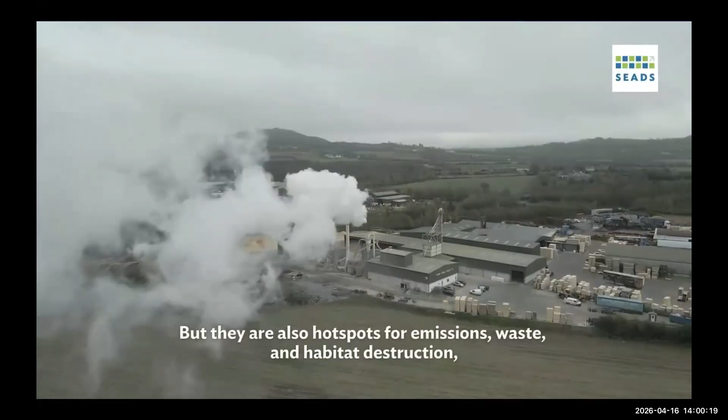Ports are the lifelines of our economies, moving 80% of global trade. But they are also hotspots for emissions, waste, and habitat destruction, while facing climate risks and other threats. The challenge is urgent, but it's also an opportunity to transform ports into hubs of innovation, efficiency, and resilience. Today, we're joined by experts who will inspire us with practical strategies and success stories on shaping green and resilient ports that cut emissions, improve air quality, and drive sustainable, future-ready growth across Southeast Asia.

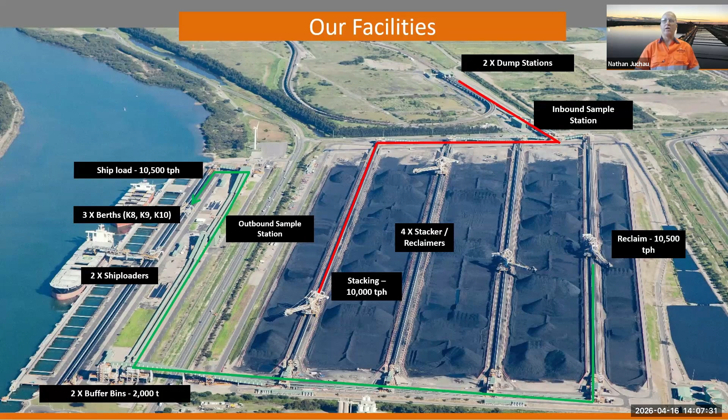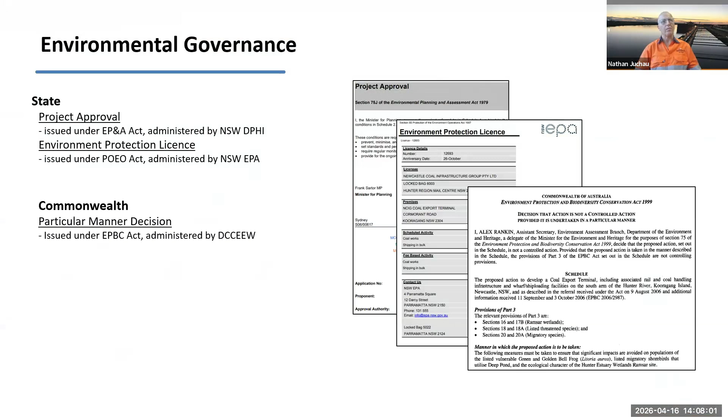When we look at what that means, we operate under a strict legislation and environmental approvals framework, and like I said, it governs what we do and our obligations. Our primary instruments are at state and Commonwealth level, you can see those instruments on the screen, and the regulators that enforce those are also a key stakeholder group which we need to service and satisfy through what we do.

How we do that on site, the usual way is we have management plans. They document the way we manage activities and the controls that are in place, translating a complex set of statutory requirements, legislation, approval documents and the like into language and systems that our people can understand, so we can deliver on those obligations.

That governance really gives us a clear direction on the key risks and controls we need to put in place to mitigate risks. The primary risks are no different for us than a lot of sites, dominated by air quality, water management and noise, which are more likely to impact a wider community or stakeholder area. But more niche things like our spontaneous combustion controls, resources management, and controls in the ecological space also need clear definition and delivery on site.

What's true here is true anywhere else. The increasing frequency of extreme weather events is also making it increasingly important that we get these things right.

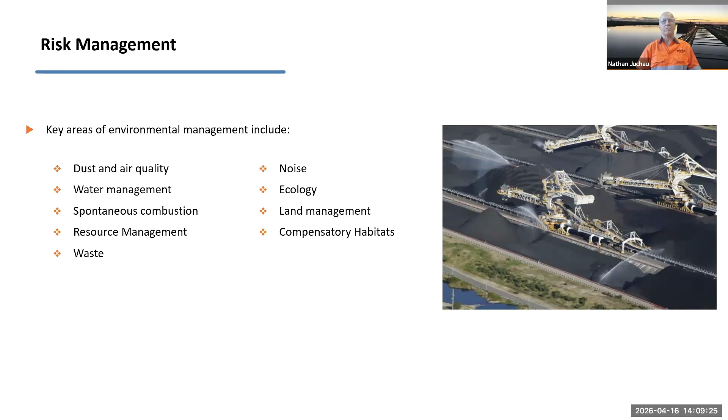I'll probably start with and provide most detail around our dust management system, being one of our key environmental risks, and you might hear a bit more about dust as we move through the presentations. We really act on an integrated system with a number of different aspects needed to account for that dynamic nature of the risk.

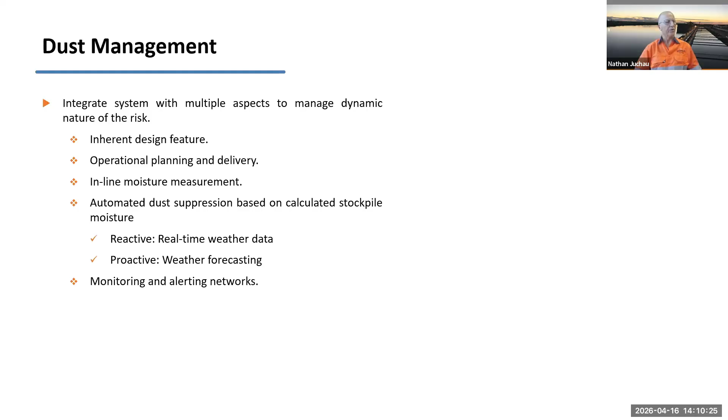Weather events, changing product types, these sort of things all need to be handled by this integrated system. It's really founded on plant design, inherent design features, infrastructure arrangement, and primary controls. Operations obviously play a huge part - the handling of the product, how we account for conditions and placement locations. Inline moisture monitoring gives us that baseline of what we need to work off, and gives us the start of our risk profiling for different product types.

But the real noticeable part of this is that automated dust suppression system. It works on weather data - a very data-driven system, using both real-time weather and forecast weather systems, and it's very reactionary. As conditions change, the controls change as well, from a greater application of water or even slowing things down, changing the way those controls are applied. The weather forecasting gives us a chance to get in front of weather systems which may cause an issue.

Things like pre-wetting stockpiles, or as you see in the photo, manual veneering. Monitoring and alerting networks are a compliance requirement, but also give us a heads up when things aren't going well. We've got operational-type monitoring around the site and compliance monitoring within the community, which allows us to adjust controls and make adjustments to operations on the run, meaning we stay within the bounds that are set for us.

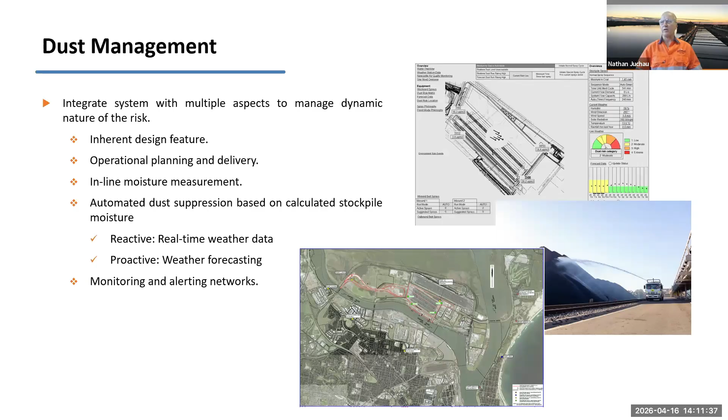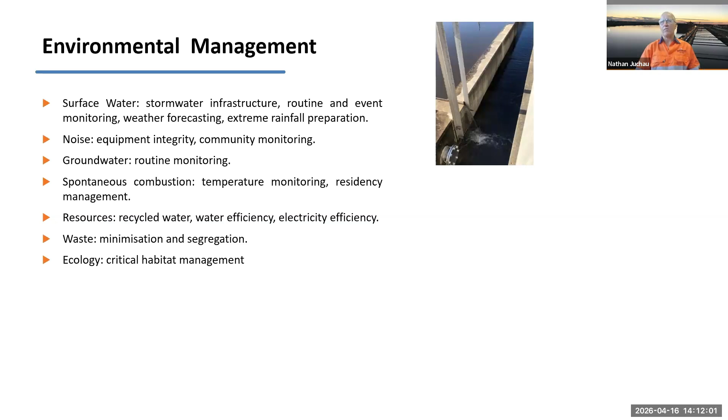There's a range of other risks I outlined previously, and there's a network of controls amongst all of those - I won't go into a lot of detail. A lot of things are routine here, but when I look at stormwater infrastructure as a way of managing surface water risk, it's important you get that right and are mindful of your conditions and those changing conditions when it comes to extreme rainfall and the like. Noise is a lot about monitoring, but also about constantly keeping on top of your equipment integrity or condition, which becomes a very difficult problem if it gets away from you.

Resources management - a recent addition for us is the introduction of a recycled water stream. We're really conscious in Australia of drought conditions, and as those conditions start to apply restrictions to the community, it's important that as a business we don't heighten that. So we're at the point now where greater than 90% of our water is either recycled water or captured on site, which is a big change from years ago. That's been a big change in the water security space, but also the social equity space.

Waste mitigation, segregation, also critical habitat management. As I said, we're close to critical wetlands, and NCIG manages, partially as an obligation, compensatory habitat, but also the habitat for two endangered species - an amphibian and a bird species - is managed actively by NCIG. So that's kind of it when we look at risks around the environmental space.

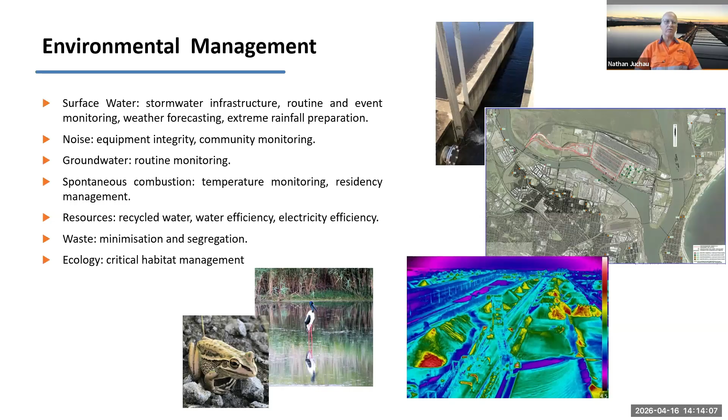It's also important that we manage and provide guidance to stakeholders on their expectations, but also let them understand what NCIG finds important and what's important to us. How they understand that is primarily through our sustainability strategy. You can see from our strategy there, it started out with our customers' requirements and staying attentive and flexible to that. Also a strong governance and compliance basis, where a lot of this information and controls I've just talked about fits in, but the above-compliance side of things is kind of what's captured here.

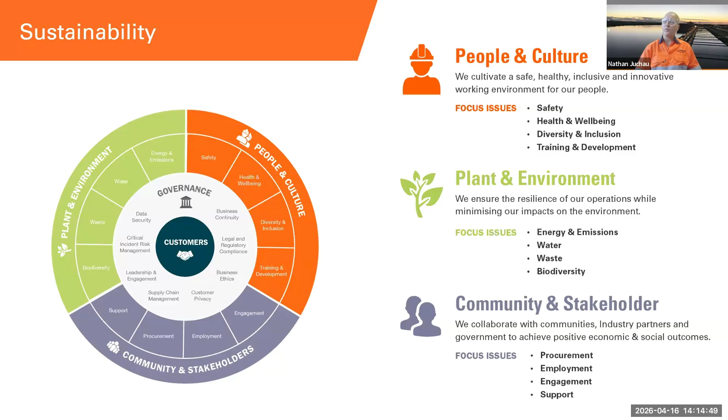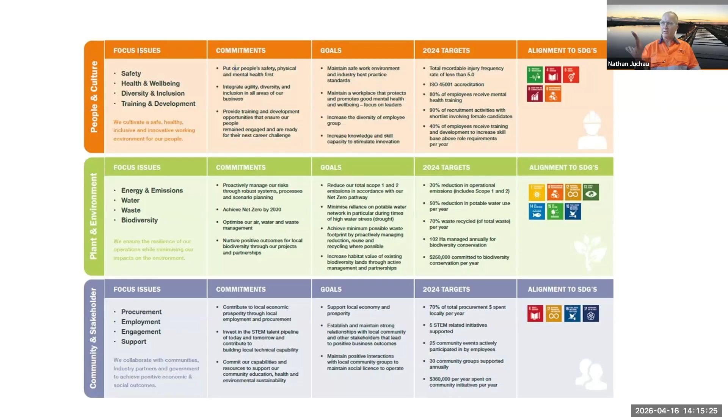You can see the area we're talking about now is the plant and environment space. We make sure we're very clear on what that means, so our people can understand, but also our stakeholders can understand. So clearly articulating those goals and particularly targets, so that we hold ourselves to account and can also be challenged on whether that's comparable with expectations, community standards, and social standards. This is something we've seen a large uptick in appreciation for from our stakeholders and understanding of what NCIG is all about. You can see some of those things translate from what I was talking about before.

And we really demonstrate that commitment through our transparency. It's great if you're doing good work - it's even better if you do good work and people know about it. So again, getting out there those stated commitments, what that means, the level you want to achieve, and then demonstrating your performance and being very transparent around that.

So that looks like for us: a website, management approach documents which lay out obligations and commitments, policy suites, performance reporting - being very transparent around that - sustainability and compliance reporting, which are different and have a different tone, but certainly making those available. And then the background data, which helps people see those trends and be really transparent around performance that might be good or below par, and demonstrating that you own that and are prepared to continue working toward what you set out to achieve.

So, Jackie, thank you. That's all I had for today. Happy to hand it over.

Nathan, that was fantastic, and thank you so much. I think it's a really fantastic demonstration of how things are done well, and I've certainly had the benefit of visiting your facility, and I can verify that it certainly is done well. Really appreciate that presentation. We'd love to invite you back for Q&A at the end of the session. I've certainly jotted down a few questions, and I'm sure the audience have some as well. Audience members, if you have questions for any of our panelists, please use the Q&A chat function, and we'll start to see those coming through and respond towards the end of our session. But Nathan, thank you so much.

DSH has sold over 10,000 units installed in 74 countries around the world. We work with a range of materials: aggregates, grains, fertilizers, salt, sugar, wood pellets, and we work with most of the largest corporate companies loading bulk materials in the world.

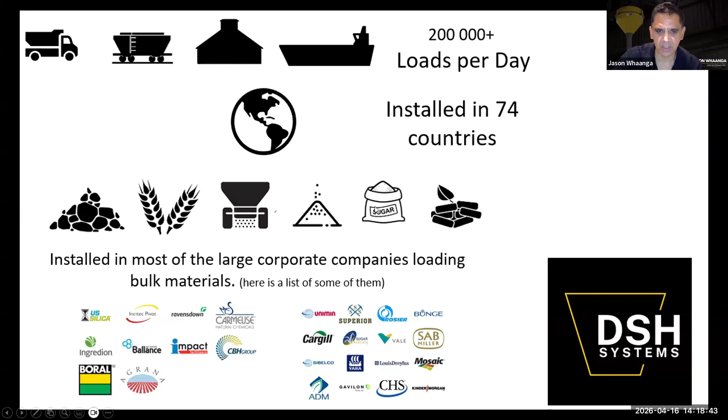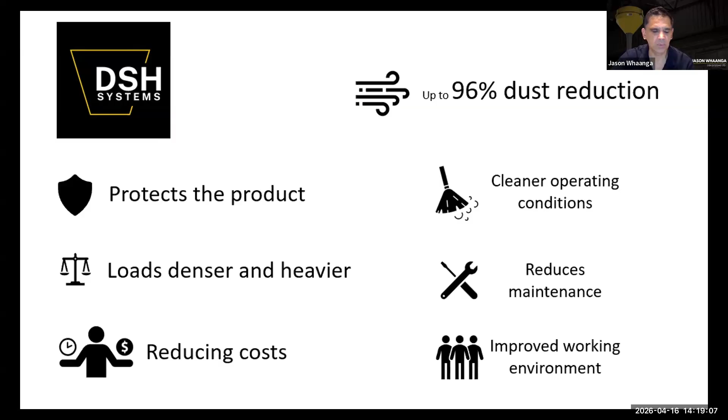When we work with products as far as we're loading, we try and reduce the dust by up to 96%. When we do that, we can protect the product, clean our operating conditions, load denser and heavier, reduce maintenance and reduce cost.

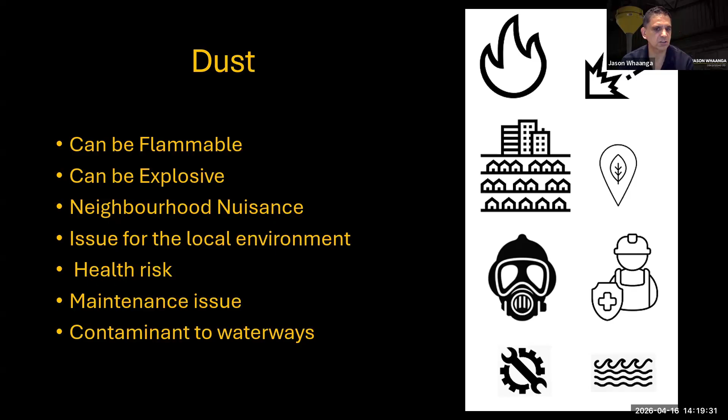And I'm here to speak about dust. As Nathan alluded to earlier, there's a number of factors with dust that are problematic. It can be flammable, explosive, a neighbourhood nuisance, issues for the local environment, health risks, maintenance issues, and it's a contaminant to waterways.

As far as explosions go, I had the pleasure of going to this site in the UK. Around about 2020, they had an explosion that blew the top off 50 silos at the site, and the cost of remediation from this risk was significant. I looked at the infrastructure they put in after the fact, and it's so big that reducing the dust before this happens definitely reduces your risk.

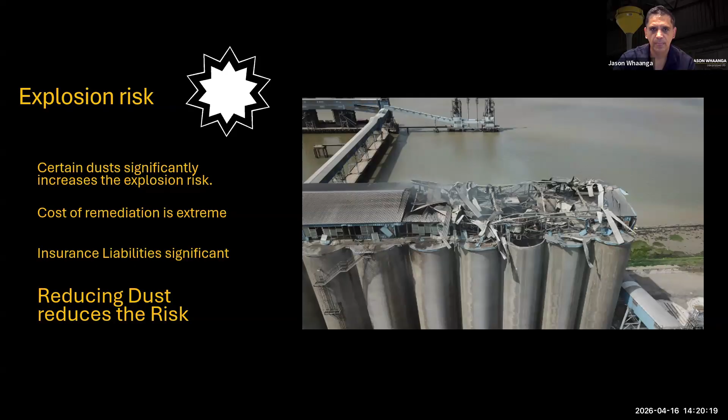This is another site. They had issues with the neighbours complaining about the dust from across the other side of the harbour. They had a standard telescopic chute loading fertiliser into the ship, and they were told to sort it out, otherwise they would close the port. The cheapest and easiest way was they communicated with us, and you can see quite a big difference from before and after.

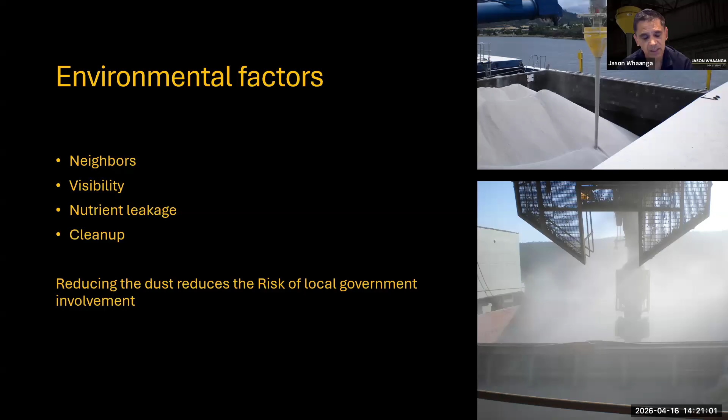Unfortunately, our system will work with most products, but unfortunately coal, Nathan, isn't one of them. And the other ones are like flours or powdery products.

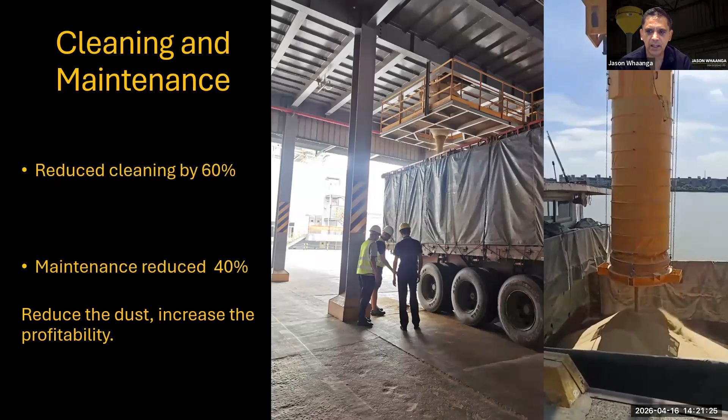So one thing is, if you reduce the dust, you reduce things like cleaning and maintenance. This is a site in China. They manufacture soybean oil, and they installed a number of systems, including our hoppers here. They reported to me that they reduced cleaning by 60% and their maintenance at the same time within these areas of the plant reduced by 40%.

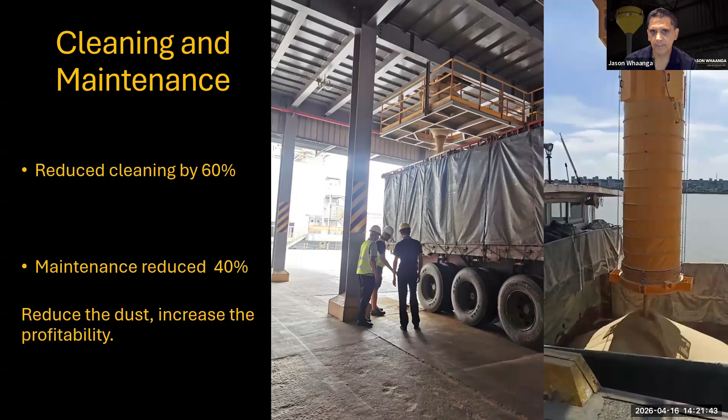So with DSH, one of the key things for us is to work through our design criteria for passive dust reduction for equipment. First of all, we've got to understand the reasons why the dust is being generated in the first place. And then we decide, can we passively manipulate it either through our hopper or through some other company's technology, and we can help our customers find that product.

And can you passively manipulate the environment? That's around something like, can we put something in the way to stop the wind coming through, close the door, those sorts of things.

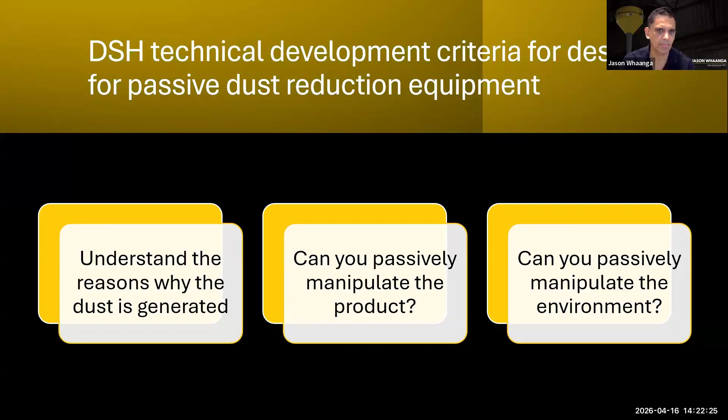From that criteria, then we use our fundamental design principles to design or sort out a product for the customers: controlling the material to control the dust, which I'll talk about shortly; keeping the dust within the product stream, which is containing it; reducing the number and size of weak transfer shapes, which I'll also talk about; and keeping your technology simple and smart, designing the solution for each application and material, not just something you get out of the box and hope it works.

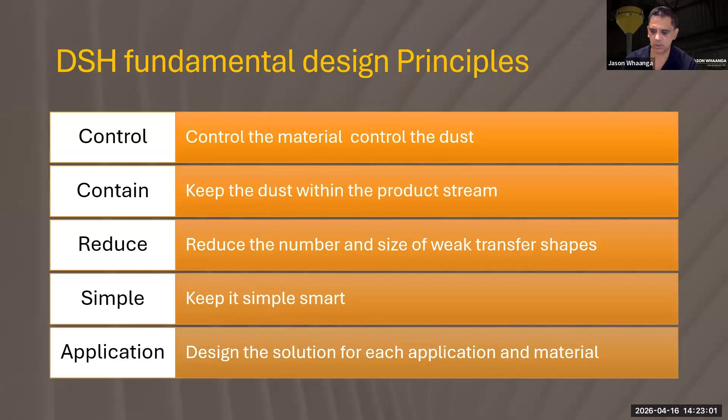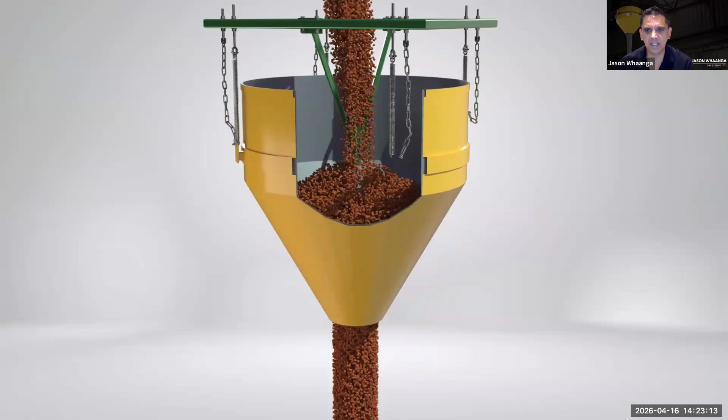So this is our hopper. DSH hoppers control the material from the entry point to where it is stationary in the pile. We backfill the hopper to take the air out of the material as it enters, and it discharges in a solid heavy column. That solid heavy column keeps the dust inside, and as it enters the pile below, it fills the pile up from within, keeping the dust contained.

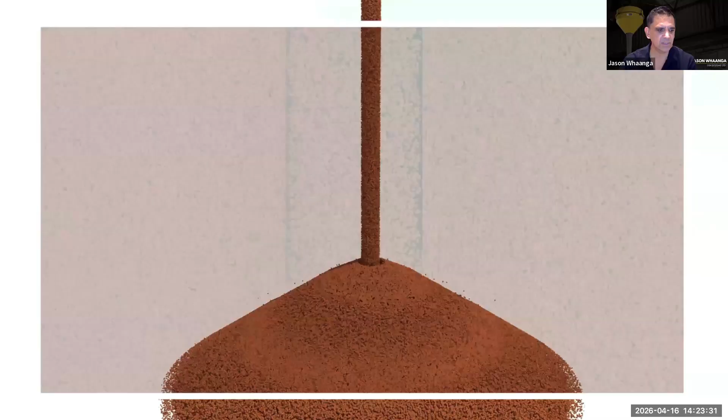The shape of material is the key thing. With our hopper, we create a circular round stream, a column of material that falls through the air up to 30 meters, and it drives into the pile below.

Now, shapes of material have a big impact on how you can control the dust. If it's a weak shape, like the half moon you see coming off a conveyor, it will aerate very quickly. An aerated product will fall through the air down into the pile below, and it'll slide across the surface or ricochet, creating dust.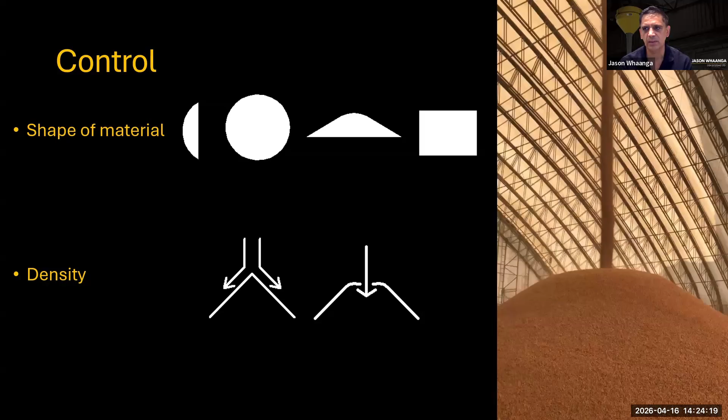This is wood pellets loading at 600 tons per hour, falling 30 meters. So in some applications with some products, you can get very good results by controlling the product through technologies like ours or other technologies.

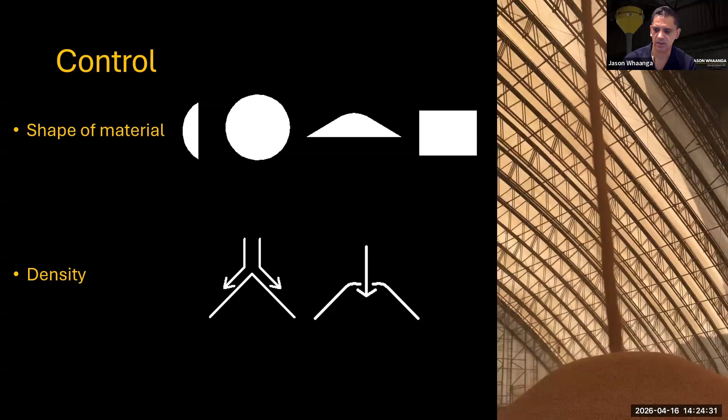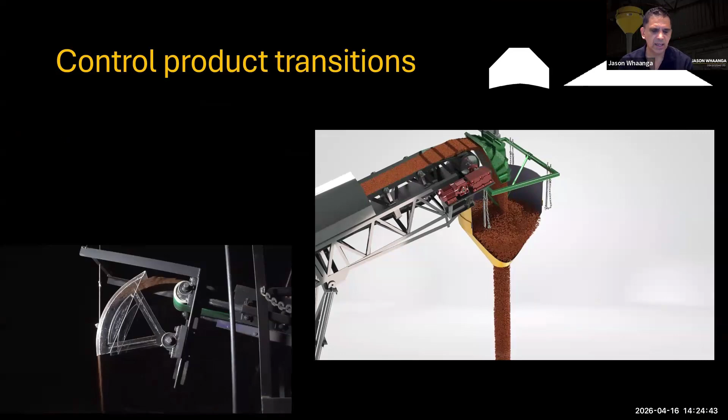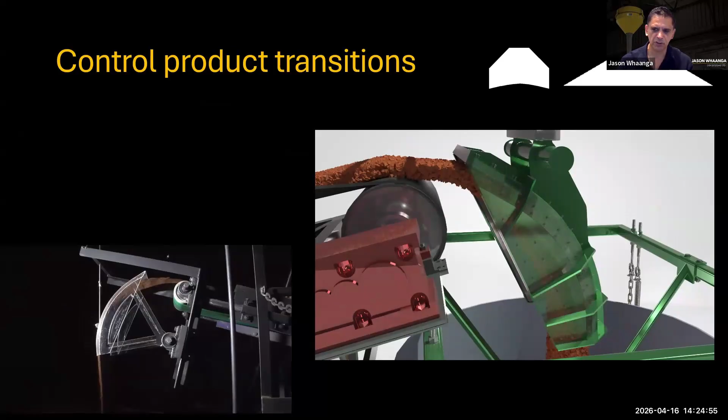Other technologies include these product transitions, like in the video here. This is a compressing deflector, and we control the direction, speed and shape that the material flows from the discharge of the conveyor, so that we compress it to keep it in a good strong shape, reducing the time that it aerates. That way we control it to a point where we can take it into our hopper, or it can go to another conveyor, or other applications.

When we come to design solutions, our key criteria is understanding what we're loading - what's the material, whether it's an aggregate, wheat, or bran - and how you're loading it. We look at technologies, whether ours or someone else's, that can stop the dust, and we may integrate a number of technologies together, or talk to our clients about ways they can do it.

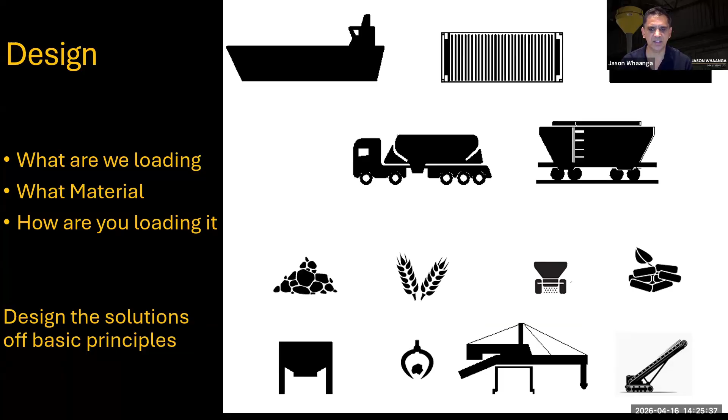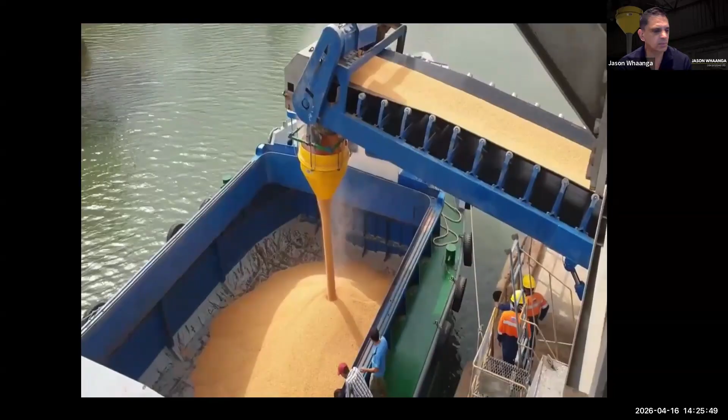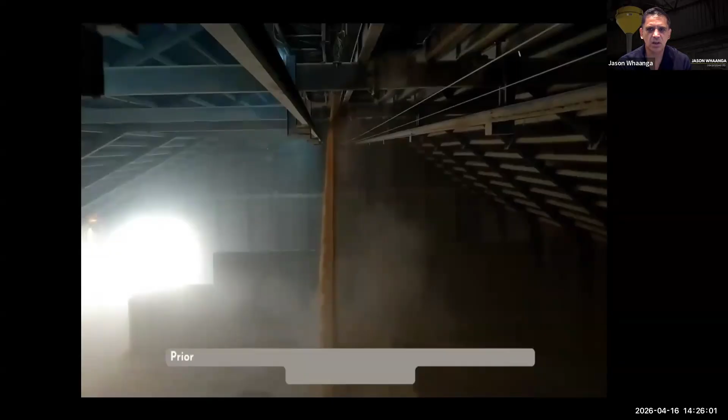This is a port loading site in Vietnam. We engaged with them in 2019, and we load things from ship loaders to truck loaders to warehouses. We had to deal with lots of different things like wind, applications like this bulk store, and even the ship unloaders. What we found is we had to design every solution to fit that particular application.

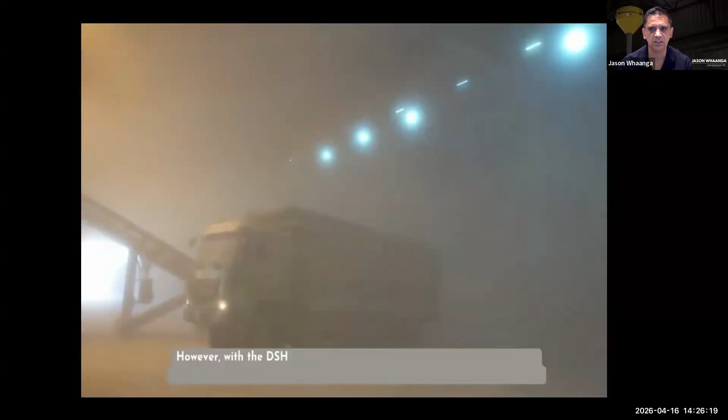You can see here, prior to us installing this hopper, it was extremely dusty. This is post the installation, and in the next shot you can see a significant difference. We went through and changed most of them. The customer was very satisfied, and I think we've got almost 20 units at this site.

This is our latest solution - a grain terminal in Quebec. We were asked to provide a solution for them. It was a very tricky solution because they needed a unit that could be tilted. The unit must not overfill, otherwise you've got weight issues of material going up the chute. We also had to design an overflow and quite a number of different factors.

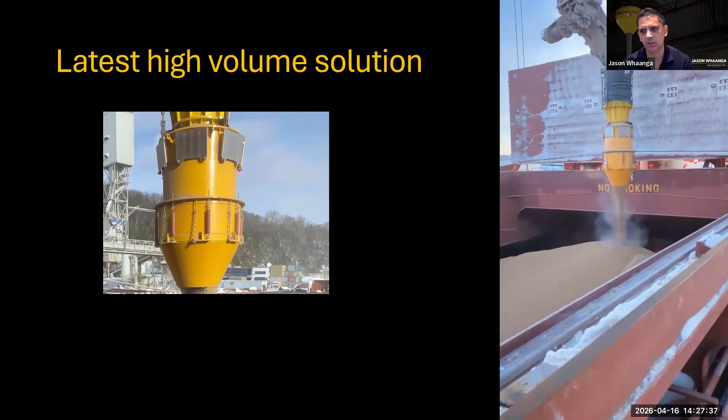So we came up with this unit here, and you'll see in a second that one of the issues we had to contend with is there was a batch weigher, and you can see the flow changes for a second and then it starts back up again. So we had to take those pulses into account - when you design something for a site, you've got to work around those things.

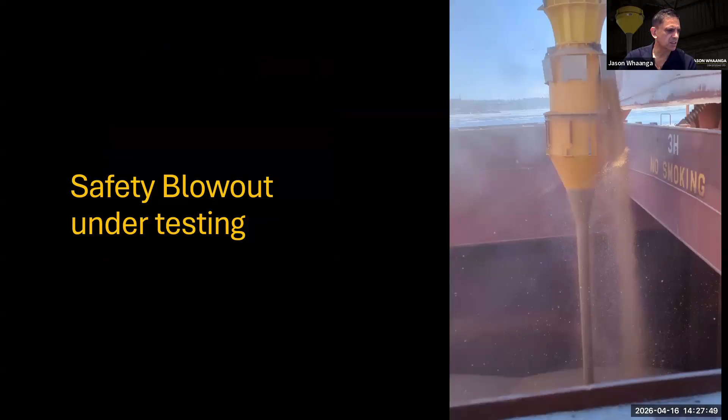Here's the safety blowout under test.

We also develop things like trimmers. This is a project we're doing for an Australian port, and we're also doing one for a USA port that's quite different. This is a hopper at the top of the chute that I showed you in China, and we can develop things for cranes and stackers and a variety of materials. The good thing about this is it reduces the wind and requirements for filtration.

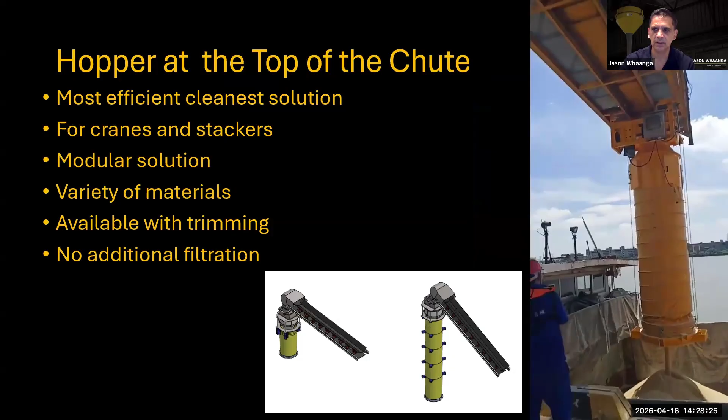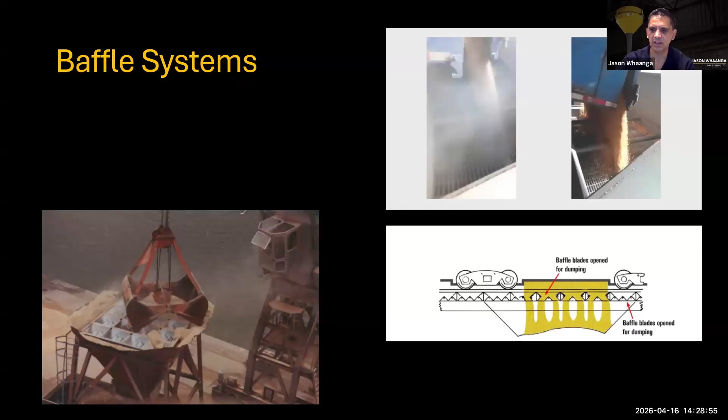As well as that, we have partnerships with companies around the world, like these baffle systems - this is an Australian baffle making system. How baffle systems work is they stop the air from displacing from around the area, so that when you dump a pile of product there, instead of the air rushing away carrying all the dust, it traps that air underneath the baffles, and the product flows through with significant dust reduction.

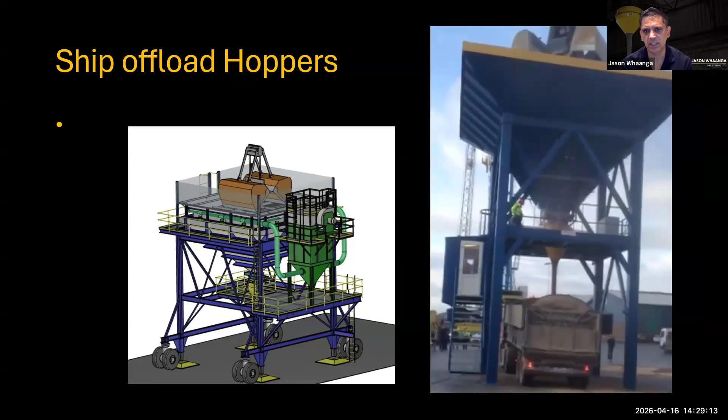This is another technology that we work with - our hopper underneath an unloading silo. So when you integrate a baffle system and our hopper, you get significant dust reduction.

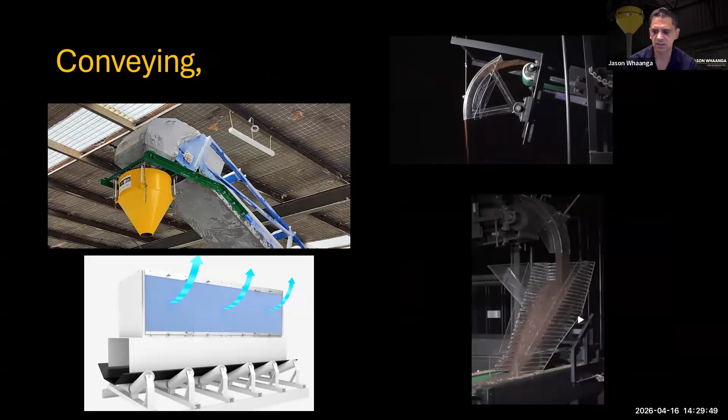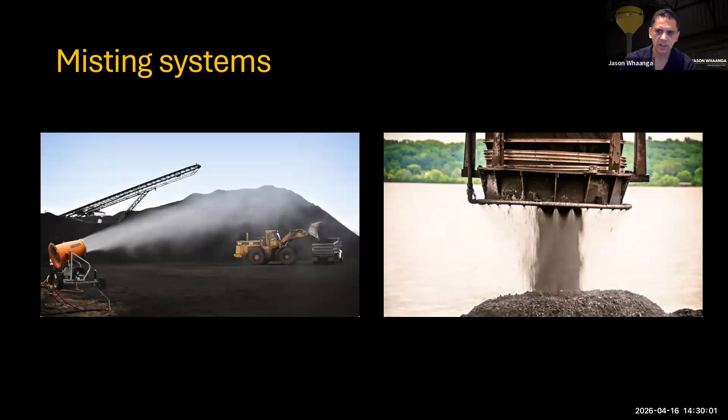With conveying, we have a number of technologies where we can shape the material to stop the dust, so instead of it being in an uncontrolled fashion, it's under control. Where you can, we help put you on to things like passive dust filtration, where you're changing the shape and there may be some dust there. We've also designed a new head box for chutes to integrate a few of these technologies, as well as our blowouts. And of course, you saw the misting systems and Nathan's chute systems before - we've actually integrated one with our hopper as well for an extremely dusty product, where they didn't want the overflow.

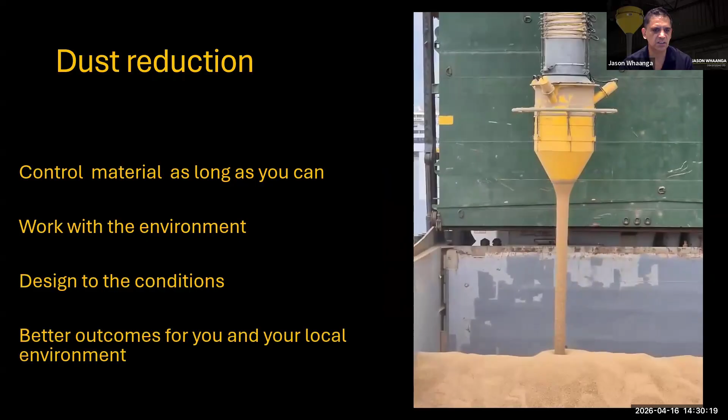So in conclusion, if you want to control the dust, control the material for as long as you can. Work with the environment that you're in - don't try and fight it. Design to the conditions, and you get better outcomes for you and your local environment if you work to those kinds of standards. Thank you.

Thank you, Jason, so much. That was a fantastic presentation, and it was really great to get some insights into the different solutions that are out there that can be applied to existing infrastructure, but also new infrastructure that can be put in place to manage some of these dust issues. I think really learning and understanding about the shapes and thinking about the different types of materials and the environments that ports are operating in is critical to finding the right solution.

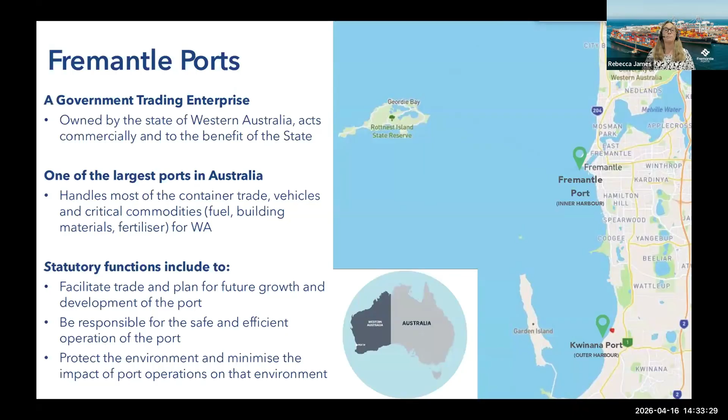As a government trading enterprise, we have statutory functions under our Western Australian Port Authorities Act: to facilitate trade and plan for future growth and development of the port, be responsible for the safe and efficient operation of the port, and have a responsibility to protect the environment and minimise the port's impact on that environment. Thank you, next slide.

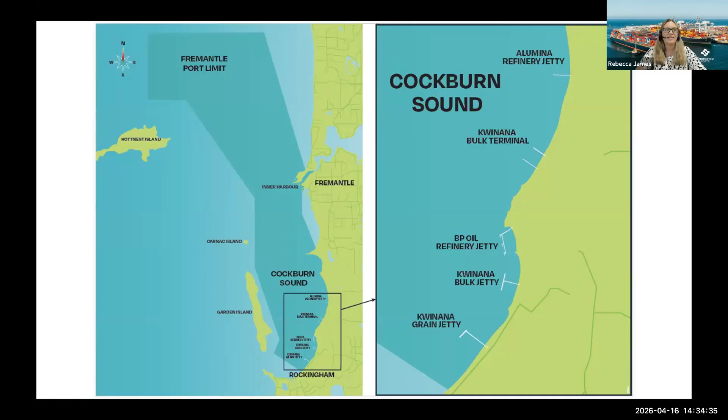Thank you, next slide. The facility I'll be talking about today is the Kwinana Bulk Jetty, where we have our Siwertell unloader. This is mainly an import facility, and we have third-party stevedores undertaking the unloading for us. There are two berths at this jetty that accommodate bulk products such as fertilisers, sulphur, ammonium nitrate, and liquid bulk commodities including petroleum, liquid fertilisers, and bitumen.

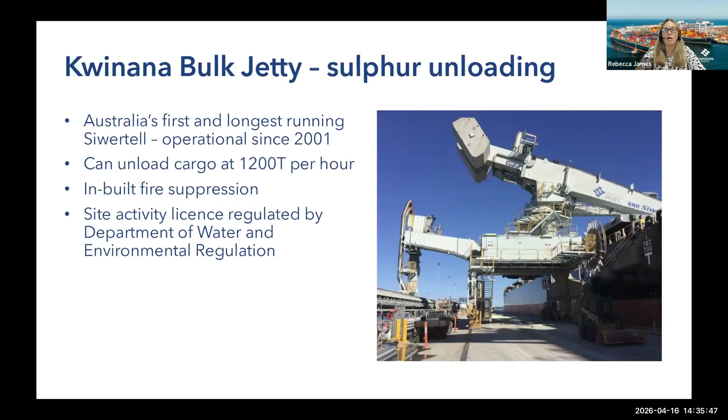Next slide, thanks. At Kwinana Bulk Jetty we've got Australia's first Siwertell put into operation, back in 2001. One of the main drivers for that was the location of Cockburn Sound in which we're operating. The Siwertell we've got can unload cargo, or sulphur, at 1,200 tonnes per hour, and it includes an inbuilt fire suppression system, which is important for sulphur. Like other bulk handling facilities in Australia, our activities on site are very heavily regulated, and we hold a licence under our State Department of Water and Environmental Regulation.

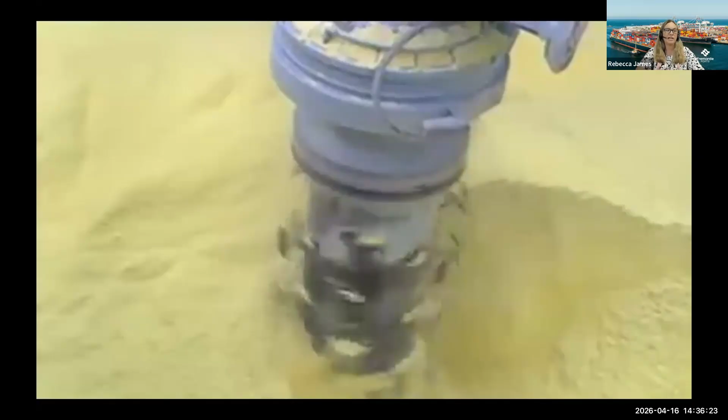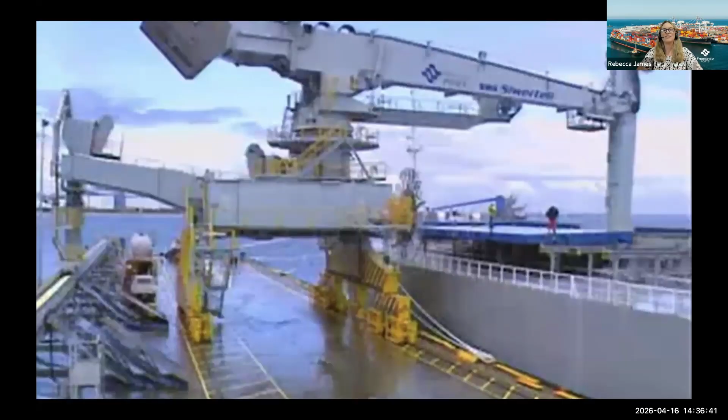This next slide shows the Siwertell inlet feeder. The sulphur is picked up from below the cargo surface by a counter-rotating head, which feeds material into the vertical screw in a continuous unloading fashion. It did look much better on video, but hopefully you can get the picture. This is the Siwertell from the outside—often you really can't tell that operations are occurring, due to the lack of dust and spillage that can often be associated with traditional grab unloaders and other methods.

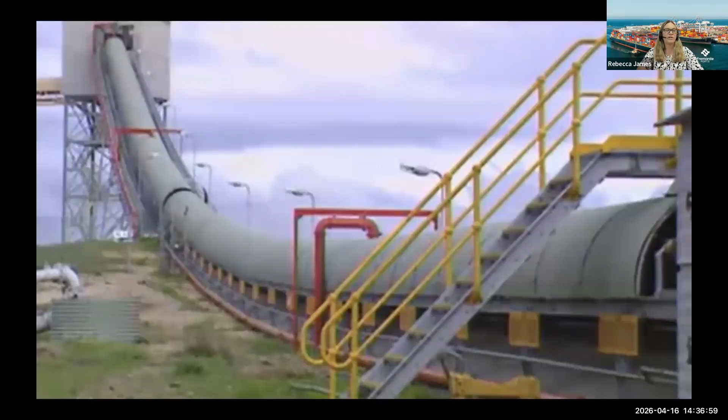Back on the other slide, the bulk material transfers from the vertical conveyors onto the horizontal conveyors, and the material drops through enclosed gantries that have their own dust filters leading onto the conveyors.

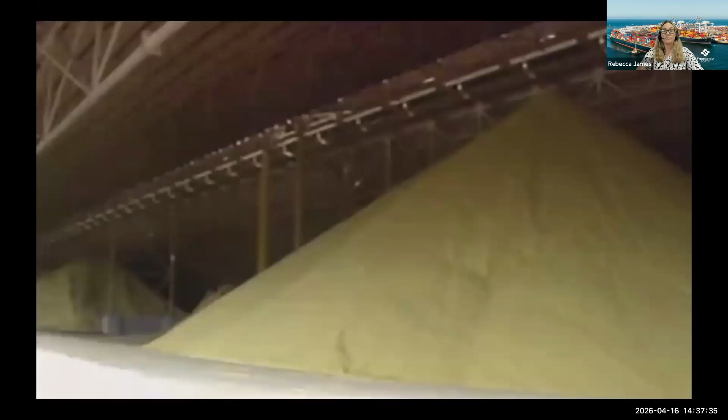The next slide shows those conveyors, where there are fully enclosed conveyors that come down from the jetty and lead into the landside shed on shore. The next photo shows the fully enclosed system created by the Siwertell and the conveyors, leading in and dropping down from the shed straight into the sulphur shed.

Some of the main environmental benefits from a system like this is that there's near zero dust emissions in the outside environment, as they're fully enclosed from the ship hold to the shore conveyors. This means dust isn't escaping into the air during unloading, and eliminates the need for water sprays, large dust suppression systems and dust monitoring networks.

There's no spillage either into the water or onto the berth. This can prevent cargo entering the harbour or contaminating the berth side, avoiding both that contamination and costly berth cleanups and loss of products.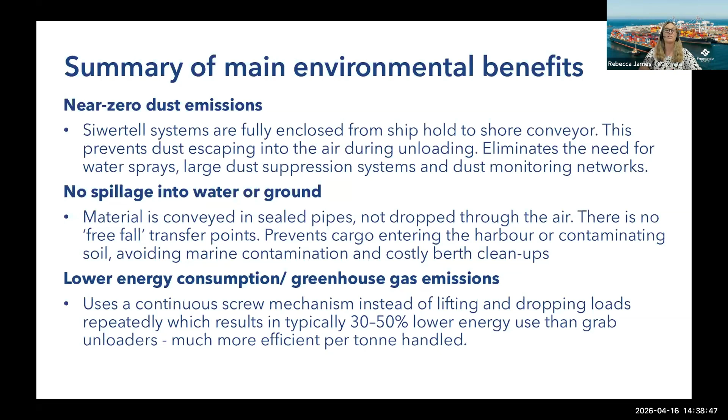Because it operates with that continuous screw mechanism, it results in 30 to 50% lower energy use than traditional grab unloaders. So it's much more efficient from a greenhouse gas emissions perspective per tonne handled.

So why does this matter? For those of us in the environment game, and those who understand the importance of this, the big thing is that it protects our air and marine quality around ports. For our social licence to operate, this also makes the community much happier and reduces complaints, giving us a reputation that allows us to build and continue to grow our port operations.

When we put the Siwertell in, this was a big plus in terms of getting more streamlined environmental approval, and compared to the dust, spillage and other monitoring conditions we have for our bulk loading and unloading sites, this is really very simple and makes my life as an environmental manager much easier.

It improves the work health and safety environment for our workers on site, and helps achieve organisations' sustainability goals and those emission reduction targets that most of us are working to in today's world.

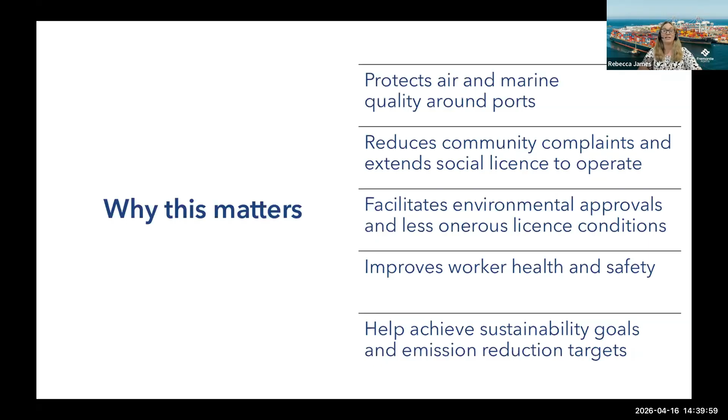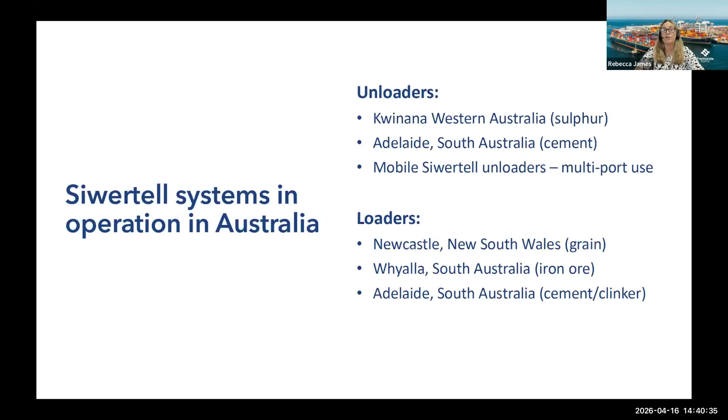Still in Australia, bulk ports are dominated by grab cranes. This is my understanding, and there may be others on the call with other information on where the Seawatels are operating in Australia. We have ours for sulphur in Kwinana, and another unloader in Adelaide for cement. There's also a couple of mobile Siwertell unloaders kicking around some of the ports that can be moved for multi-port use, and then we have 3 loaders in Newcastle, Whyalla and Adelaide with different products there.

So why, with all those benefits, wouldn't everybody be using a Siwertell for every operation? Well, there are definitely considerations to where this type of infrastructure can be used, and one is the high capital costs. Seawatels are significantly more expensive than traditional grab crane systems, partly because they require all this purpose-built infrastructure, enclosed specialised conveyors and inbuilt dust control systems.

There is some limited cargo flexibility, so it's not for every port. You need to look at your port products and whether this is suitable. Seawatels can struggle with large, lumpy material or sticky, highly cohesive cargo, and some really abrasive bulk cargo isn't necessarily suitable. In general, it tends to be less suitable for multi-cargo ports handling varied commodities, and more suitable when you have a specific one, for instance with the sulphur at Kwinana Bulk Jetty.

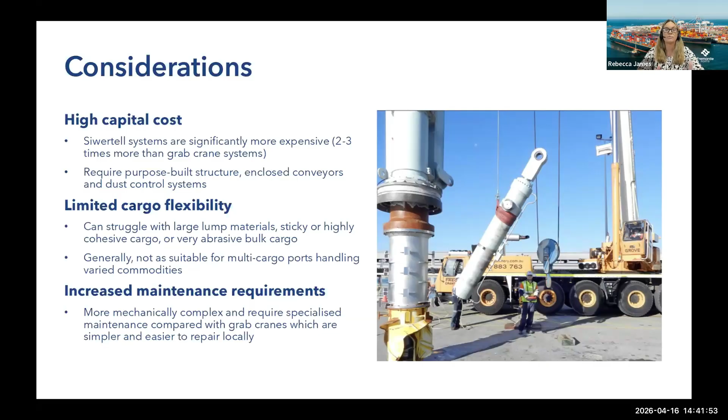Because they are more mechanically complex and require specialised maintenance compared to the really simple grab cranes, which are a lot simpler and sometimes easier to repair locally.

Thank you. That's me, and I have got questions there, but we'll save those for the Q&A. Thank you, Jackie. No problem. Thanks ever so much, Beck.

I really appreciate that. Similar to Jason's presentation, it's really about thinking about the nature of the material you're looking to handle and finding the right solution. As it relates to the Siwertell, it's more of a dedicated commodity rather than that multi-cargo function. That was really fantastic to hear your presentation today. Beck, we'd like to invite you back for Q&A at the end. I've got a couple of questions noted down for you, and hopefully if the audience have any additional ones, we'll bring those to the table too. But yeah, really appreciate your time for that presentation.

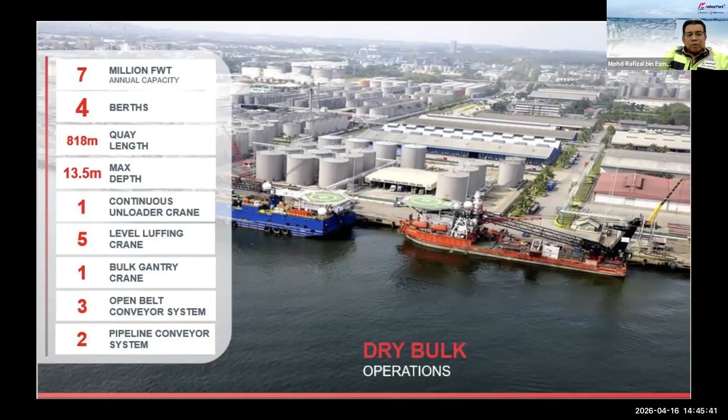As a brief, our bulk and breakbulk operation terminal has an annual capacity of up to 7 million tons. We are supported by 4 dedicated berths with 7 quay cranes and an integrated conveyor system designed to ensure safe and efficient cargo handling. For the last few years, dry bulk continues to be our major contributor to overall throughput, but due to the nature of dry bulk cargo, there are potential environmental risks, particularly related to dust generation, runoff, and emission.

Let's move to the main topic today. Dust control is one of the most important environmental focus areas in our terminal. Johor Port handles about 1.4 million tons of clinker, 1.3 million tons of cereals, and about 1 million tons of fertilizer and minerals. All this cargo is dusty and very sensitive to the weather.

Why does this matter? Dry bulk operations are naturally exposed to environmental risks, mainly because our operations involve very open handling activities with multiple transfer points. We also depend heavily on conventional equipment, and all this cargo is very sensitive, including to the weather. From our experience, the main concerns fall into three areas: dust, runoff, where cargo residue can be carried away by rainwater, and emission, mainly from our machinery and vehicles.

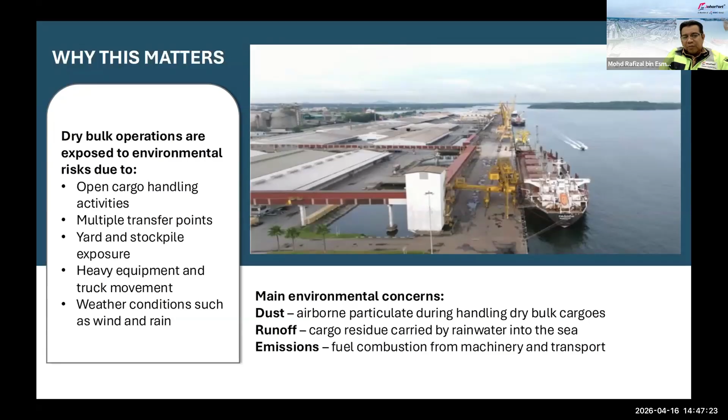Among these three, I would say the most immediate day-to-day challenge in dry bulk operation is dust management. For BBT, we have two modes of cargo transfer. We can transfer cargo from wharf to the warehouse or to the consignee premises using either a fully conveyor system, or using conventional mode with tipper trucks. So far, dust management is one of the key controls.

One of the key controls we use for dust management is a hopper with a duster system. When the cargo is released from the grabs into the hopper, there will definitely be cargo dust flying around, so this duster helps capture the dust and keep it from spreading into the air. Ideally we would fully utilize our conveyor system, but in some cases our consignee or cargo receiver does not have these facilities, so we still need to use the conventional mode with tipper trucks.

So we focus on controlling the cargo drops. We are focusing on controlling the cargo drops.

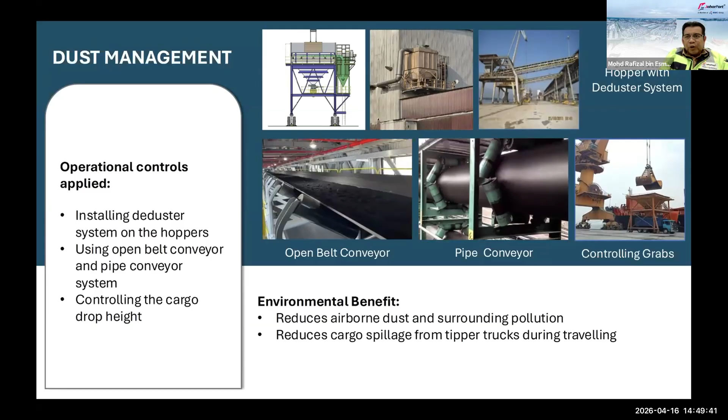This means that when the crane operator opens the grabs, we want to make sure the cargo is properly put into the hopper. The grab must be placed as close as possible to the hopper, so this will avoid dust pollution. Our operation supervisor will supervise the crane operator to make sure they follow this rule. So overall, dust control is a combination of equipment and operational discipline.

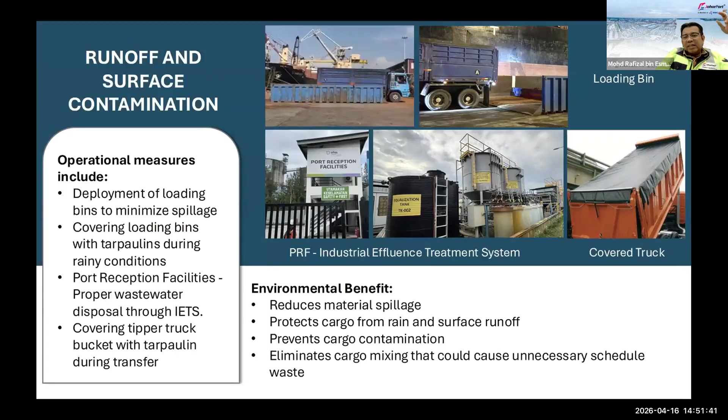For emission, the main sources are our equipment and also our trucks. Our approach is quite practical. We focus on improving practical operational efficiency. For example, we are now introducing an unmanned weighing system. With this system, we can reduce truck waiting time from 5 minutes to 30 seconds.

So we implement idle zone and off-engine practice. We also optimize truck routes to minimize unnecessary movement. All these arrangements ensure lesser fuel being burned by the machinery or the vehicle.

In addition, we plan our equipment deployment more effectively using a just-in-time approach. This means we only apply our excavator when it's really needed for the cargo to be grabbed by the crane operator. So in many cases, reducing emission actually starts by reducing inefficiency, by reducing fuel consumption, and this will directly translate into lower emissions, which ultimately benefits our environment.

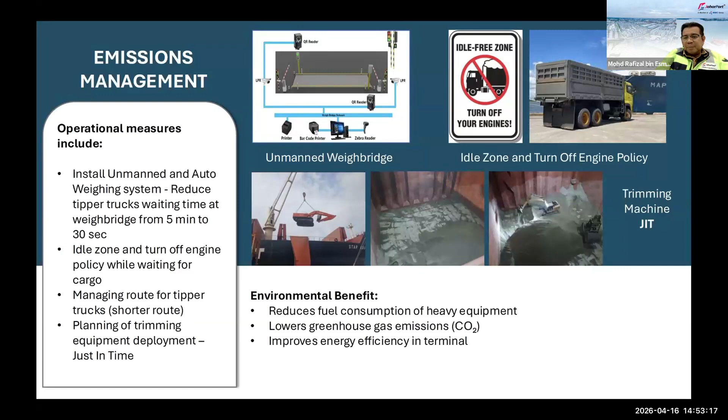Of course, it is really not easy to practice. Different cargo behave differently. Some are dustier, some are more sensitive. At this time, we need to balance between productivity and environmental control. There were also limitations in terms of space and infrastructure. Of course, some investment needs to be made, but most important is...

It's not something that the port can do alone. We need commitment also from other port users - the port operator, contractor, transporter, and also the cargo owner.

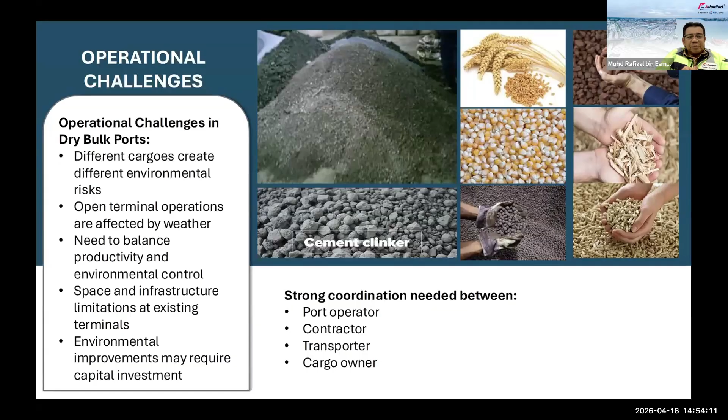As a conclusion, dry bulk operation at BBT will always come with challenges. This is not a straightforward operation. From our experience, this can be managed better when environmental control is treated as part of daily operation and not something separate. So the fundamentals are good planning, proper supervision, good housekeeping, discipline, and continuous monitoring.

Ultimately, the most effective approach is to prevent spillage at the source. Without spillage, we can control the three items that we discussed earlier. At Johor Port, we focus on practical control, operational supervision, and continuous improvement.

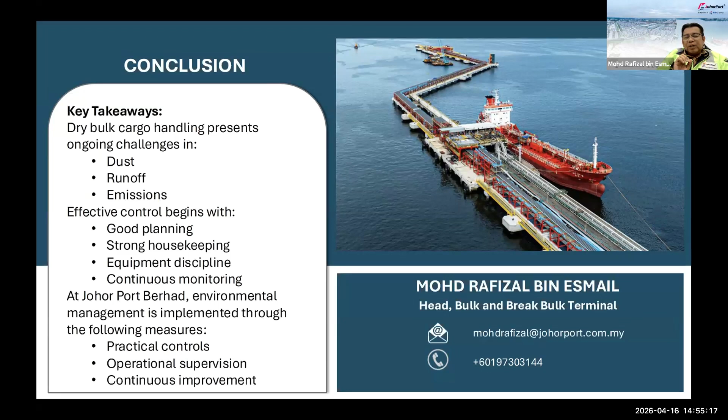My last word: cleaner operation begins with better operation controls. With that, I would like to conclude my presentation. Thank you for your kind attention, and I look forward to the discussion.

Rafizal, thank you so much for that presentation. I think one of the really important messages there for me was it's not just about the kind of infrastructure and equipment that you have on site, but also about some of those changes to how you operate, like the just-in-time arrival, the reduced idling time, and things like that. That can all collectively contribute to these better outcomes. So yeah, no, thank you so much for that presentation. It was really, really informative, and there were a few new techniques that I hadn't come across before that I thought were really valuable. So thank you so much for that.